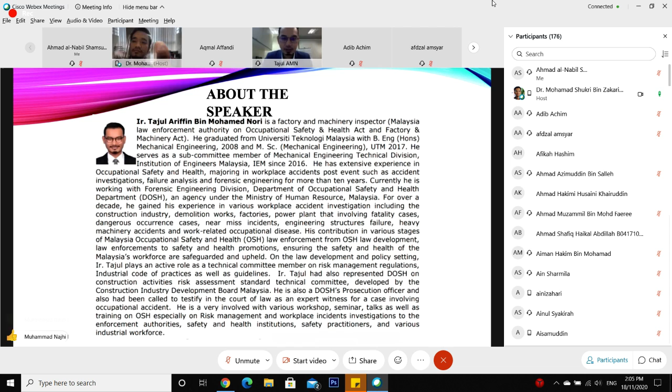Okay, Assalamualaikum and very good afternoon. Everyone can hear me? Waalaikumsalam warahmatullahi wabarakatuh, yeah we can. Hi guys, so I see a lot of students here. I hope you guys stay safe at home, I guess. So first of all, I would like to thank the organizer, the college, the Faculty of Mechanical Engineering,

University Technical Malaysia Melaka, for inviting me for today's session. So let me share my screen first. You guys see my screen now? Yes, you see my desktop, right? Right.

Okay, so let's go on to the introduction to occupational safety and health. So what is OSH? The objective, the reason why we need occupational safety and health, is it is a tool for any organization as their business strategy and the method to prevent work-related injuries or ill health, so that your workplace is safer and healthier.

So this helps employers, owners, managers of any organization to improve safety and health conditions at their workplace. So normally they put a management system, the OSH. By the OSH, it will help employers and workers to find a way to get a cost-effective and practical solution

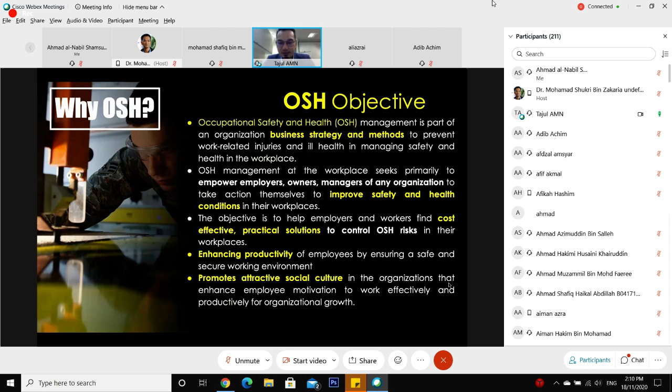to control any hazard or risk at their workplace that might harm their workers. And then, of course, if you properly manage your OSH at your workplace, you will prevent accidents, and straight away you will improve your productivity without any accidents. And this will promote an attractive social culture for the organization and will enhance the motivation to work more effectively.

If someday you graduate and join, or maybe you will have your practical training in the industry, if you go to a multinational company, then you see the social culture a bit different compared to the small medium industry, because they put safety above all for their work, their business strategy. Yes.

And last but not least, by managing OSH, you might comply with laws and regulations. In our country, we have laws and regulations that oversee OSH at the workplace. So management of OSH is something essential for your business.

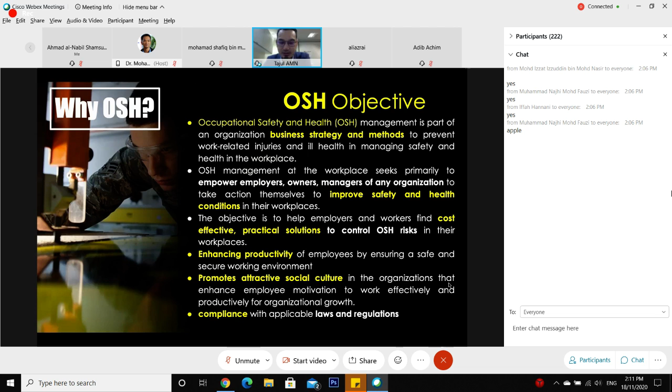Okay, let's take a look at the safety and health scenario. According to the International Labour Organization under the United Nations, the ILO, every year almost 2.78 million workers die from occupational accidents and work-related disease. This is a very huge number.

So we see the current pandemic, the COVID-19. I think it's almost a year since the outbreak. The total number of deaths from COVID-19 is about 1.3 million, if I'm not mistaken, and that's half of this number for a year. So workplace safety is something we need to look for. We cannot neglect this.

And about 374 million workers suffer from non-fatal occupational accidents. It means they have the accident but survive, though living with difficulties and disabilities. It's a big number, a big population. And among adults, 5% experience hearing loss and 20% suffer lower back and neck pain due to work-related exposure.

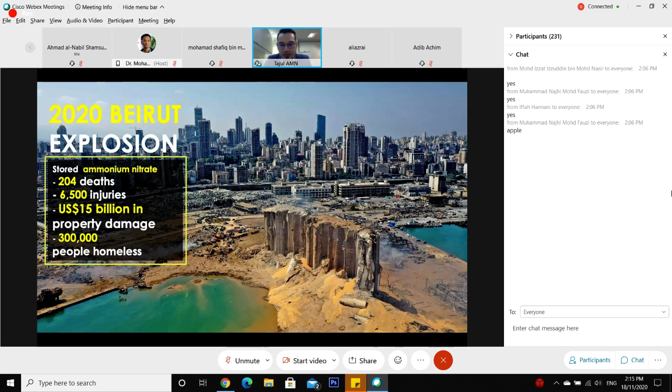So let's look at some accident cases that happened around the world. This is the Beirut explosion that happened this year in August. It's a very shocking accident caused by stored ammonium nitrate. This caused 204 deaths, 6,500 injuries, and the cost of the accident is about 15 billion US dollars in property damage, which caused about 300,000 people to become homeless. In our country, we have regulation under OSHA covering the control of industrial major hazard accidents, which involve things like ammonium nitrate. So we have regulation that may protect our country from an explosion like this.

Then the Deepwater Horizon, the BP oil rig explosion in 2010 - the damage is very catastrophic. The platform sank into the ocean. This caused about 11 worker deaths, while 17 others were injured. According to a journal from 2018, the cost of the oil spill is about 145 billion US dollars. It's a very huge amount, and this is in US dollars, so compared to our annual budget, it's still multiple times more than our annual budget.

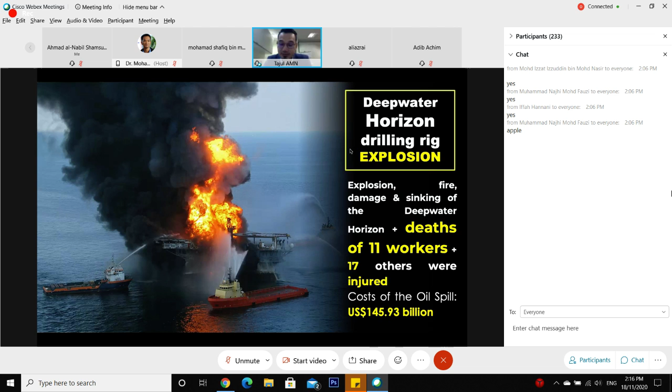Then another shocking accident happened due to the collapse of a crane in the Holy Land of Mecca. This caused about 111 people to die and injured 394. These are some of the cases that happened around the world that we need to consider when dealing with engineering management in the workplace.

Okay, looking at our local context in Malaysia, almost every week we have a very shocking accident that involves the public and also the workplace, like tower crane structure collapses, factory explosions - this looks identical to the Beirut explosion. This happened in Penang, a factory explosion, and currently we are under investigation looking into this. This is an SME industry. Also, workplace accidents affect the public who use adjacent roads, like the case that happened in KL recently, which affected a woman. It was lucky she escaped death, but this accident is something we cannot take for granted. We need to make sure this will never happen again.

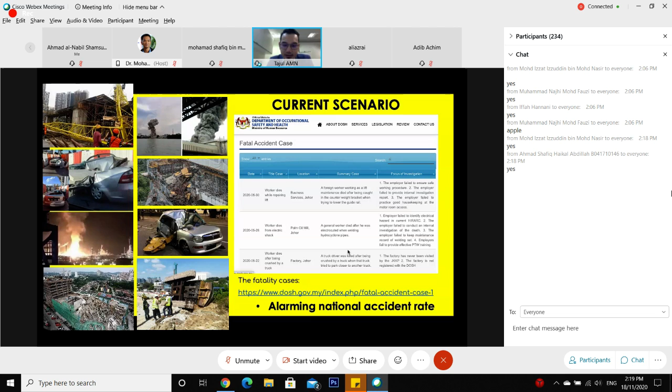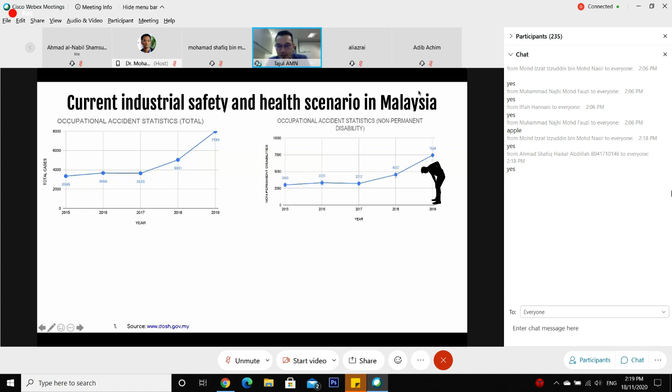So I would like to share with you the statistics on accident cases around our country. This is the statistic of number of accidents for the 5 years. We can see the increase in accident numbers, and also for the non-permanent disability accident and disability accident cases, the trend is increasing. For fatality cases, there isn't much change in the number of cases. So one of the reasons why we see the increase of accidents is also because of the increase in the number of accidents being reported to our department, to DOSH.

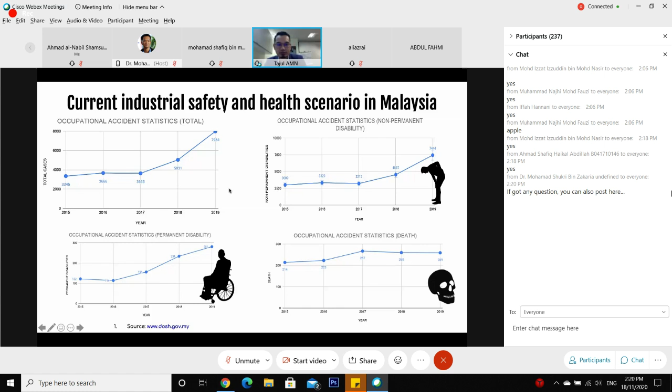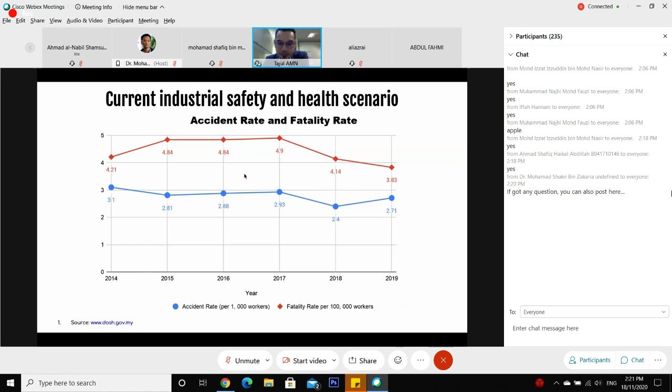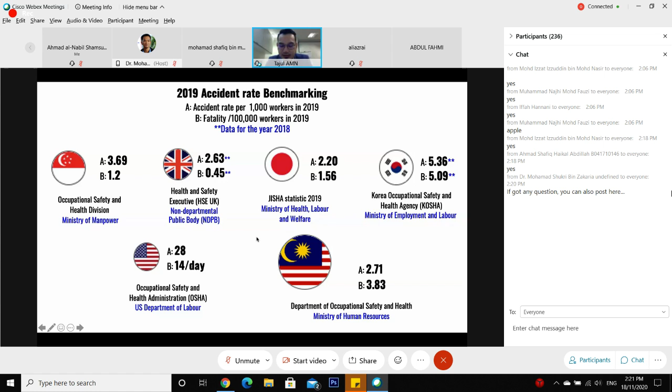If we compare to other developed countries, our rate of accidents in 2018 is almost close to the United Kingdom, but our fatality rate is higher compared to our neighbor country, Singapore. So we should not be happy with the number. We need to do something to reduce the accident rate.

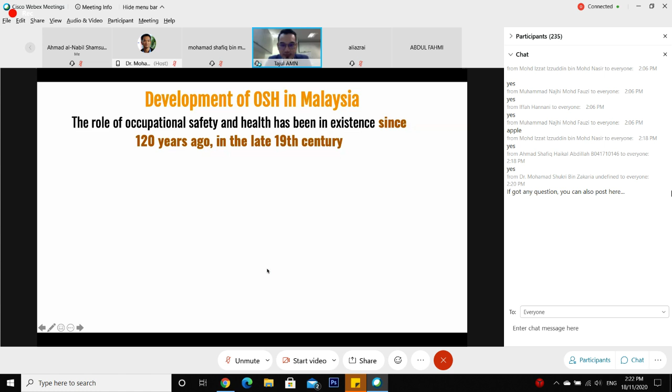Now I would like to share with you the development of OSH in Malaysia. The OSH exists from the 19th century. Back in the late 19th century, our historical background, we were very famous with tin mining. So the first law on OSH was the boiler ordinance, before our independence, enforced by the machinery branch under the mineral department. Most of the safety focus was on boiler safety.

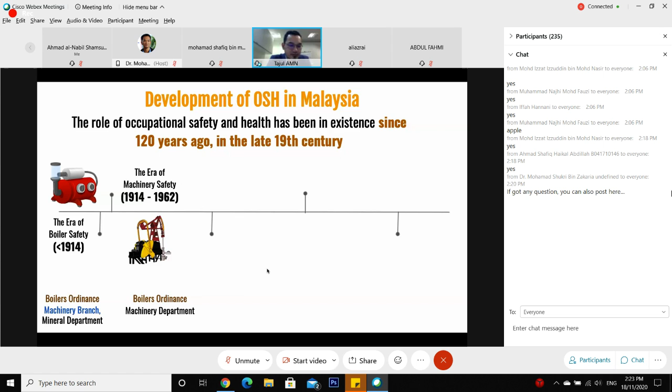That's before 1914. Then there were not many changes until 1962, still under the boiler ordinance law, but the machinery branch from the mineral department expanded to become the machinery department under the Ministry of Human Resource. Before that it was the Ministry of Labour. Then after our independence...

Because of the Industrial Revolution, it became the era of industrial safety. From that era, the Factory and Machinery Act 1967 was gazetted. This is the law on factory and machinery, and the department changed to the Factory and Machinery Department. At that time, there were a lot of factories being opened.

From 1970, before 1994, our country started looking into safety and industrial hygiene. Since 1994 until now, a new law has been introduced to our country, the Occupational Safety and Health Act 1994, OSHA, and the Factory and Machinery Department changed to the Department of Occupational Safety and Health, better known as DOSH.

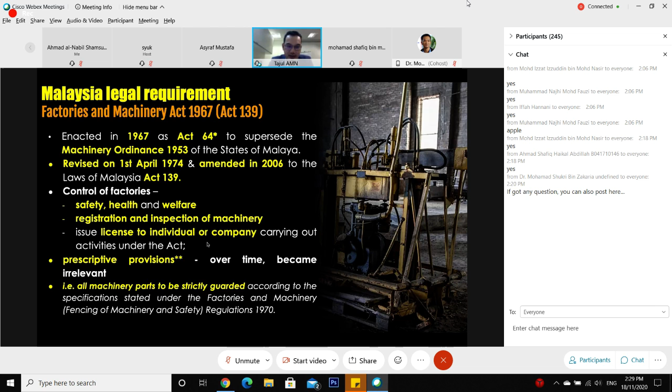And the provision of the act is more prescriptive. For example, everything is spelled out specifically in the provision — like the guard of the machinery will tell you the specific specification you need to comply with. This is a very old law, and over time it is not relevant due to changes in the state of the art.

So the approach of FMA is using the checklist system. For example, when you want to have your machinery, it will tell you everything what item you need to have at your machinery, like the safety device. Everything is strictly specified in the provision of FMA, and it emphasizes on the workers and machinery to prevent the accident. And because of this prescriptive law, the impression is that OSH responsibility is on government control, and this makes the industry depend on the government regulation.

So the FMA only covers some industries, but other industries not covered by the FMA have a very alarming rate of accident and permanent disability cases. So the government drafted a piece of law to control the other sectors.

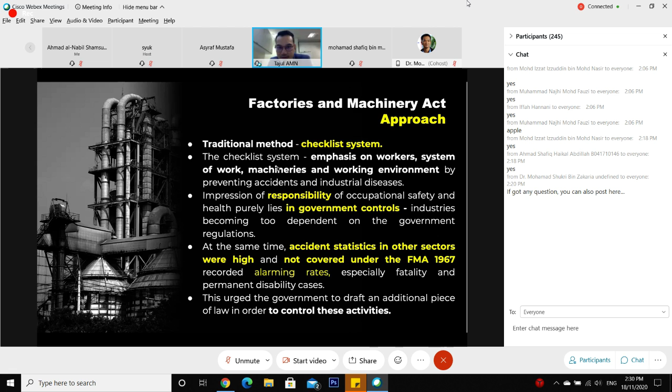So in 1994, the government gazetted a new law known as OSHA 1994 to cover the limitations of the Factory and Machinery Act. Because the Factory and Machinery Act only covers manufacturing, mining, quarrying and construction activities. Other industries, like foods, hotel, restaurant, and other business services, are not covered.

So OSHA came out to cover almost 90% of our total nation's workforce at that time, except for ships and the armed forces, because ships have the Ship Ordinance, while the armed forces are not covered by our law. And the approach is using self-regulation, and it specifies some of the general duties of the employer in the law.

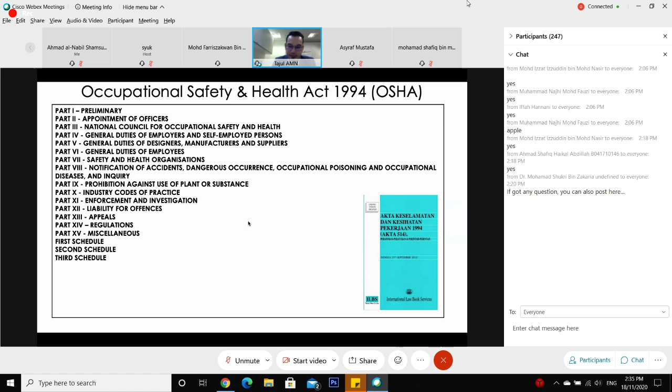For the FMA, the portion of provision looks less than the OSHA, but it tells you very prescriptive provisions. So it is thicker than the OSHA law.

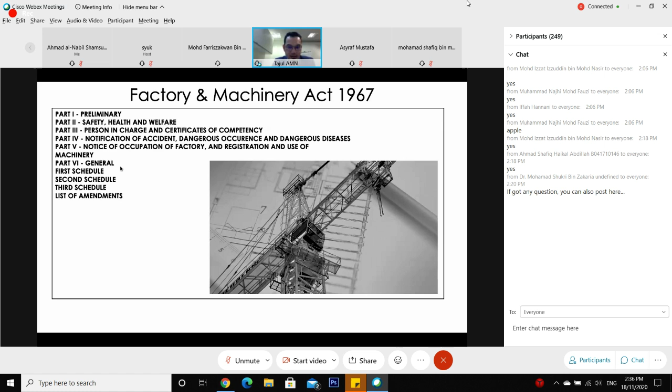So in the framework of the Act, under the Act, there are regulations, orders, industrial codes of practice, and guidelines. For the Act, you must comply with the Act, and the regulation describes what the Act needs in more detail. Also, for the orders, you need to comply with the orders. The industrial code of practice is the best practice that you can comply with. But for the guideline, it just gives you a guideline, and it is not mandatory for you to comply with the guideline.

Under the OSHA, there are provisions to report any accident or dangerous occurrence, and it tells you in detail what you need to do when you have accident cases under the regulation.

When you have an accident at the workplace, the requirement to report the accident is under the NADOPOD regulation.

Apart from the mandatory requirement, there are OSH voluntary requirements like the MS standard, MS 1722, our national standard for OSH management system. This is not compulsory, but if you have the system, you may comply with the law. There's also the international OSH system, ISO 45001, which will replace OHSAS. Currently most workplaces use OHSAS, but that will expire next year. Apart from that, there are guidelines from the ILO that any employer can use to manage safety and health at their workplace.

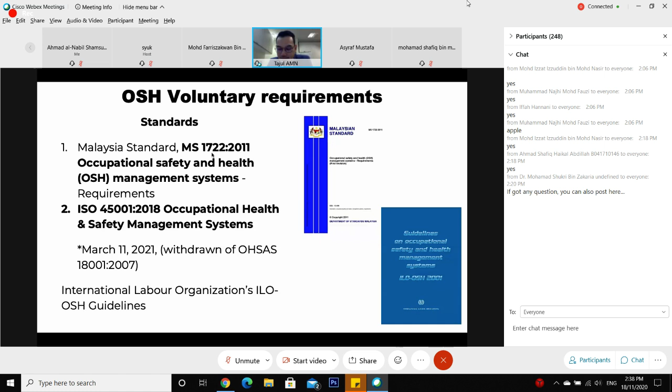So previously I told you there are two laws. Currently we are trying to merge both laws, the Factory and Machinery Act and OSHA, and it has already been passed to parliament for the first reading. It needs to pass the second and third reading before both Acts can be merged. There will be a new OSHA maybe this year or next year, we don't know yet, it depends on our parliament session. So in future there will be only one single law that governs the safety and health of the workplace in our country. Okay, so far everything okay? Any questions?

Now I would like to share with you some of the workplace accidents that I have investigated at the workplace.

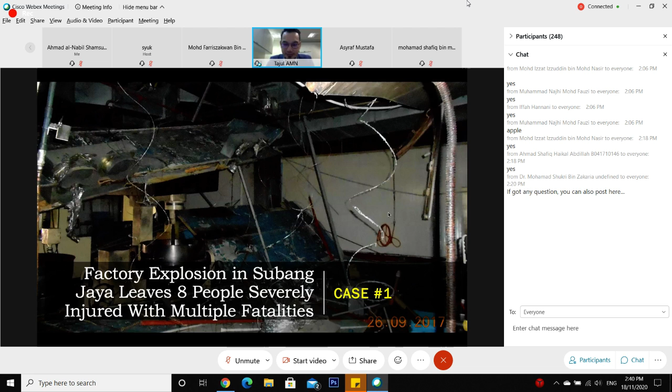So this is the first case, which happened in Subang Jaya, causing multiple casualties. This is an explosion case from a very famous kopitiam factory. Sorry for the disturbing image, but I think I have to share this with you. The case involved an explosion at a production floor in a food processing factory in Subang Jaya.

It happened in 2017, about 8 a.m. From this accident, 8 employees suffered serious injuries of varying degrees of burns, and all of them were sent to the hospital's special attention unit for emergency care. 5 of them were badly injured, about 20 to 80% burns on their bodies. One of them suffered a foot fracture, while 2 victims had only minor injuries due to the blast of the explosion.

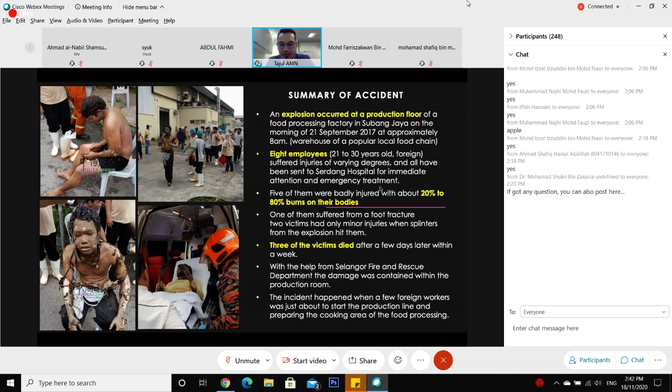Sadly, after a few days, three of them died. The bomba managed to contain the explosion from affecting other areas. All of them were foreign workers, and they were about to start production that morning at the cooking area for the food processing.

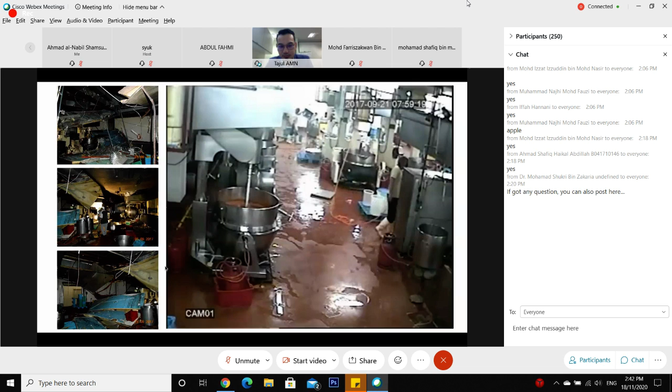This is the after-effect of the accident, the kitchen area. That morning they were cleaning up their kitchen, preparing for production. You can see the blast of the explosion. This is from another angle. It was caused from somewhere around here. You can see the video, right? Yes sir, very terrible.

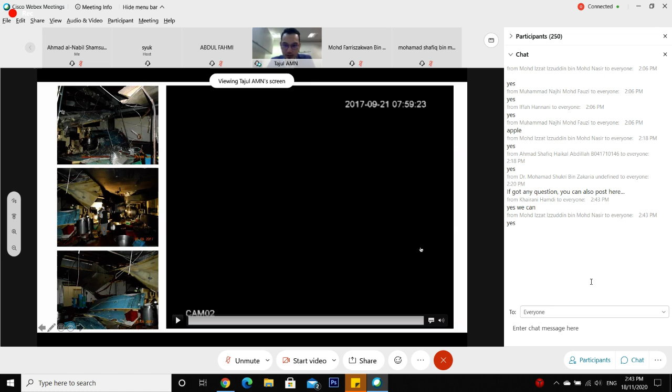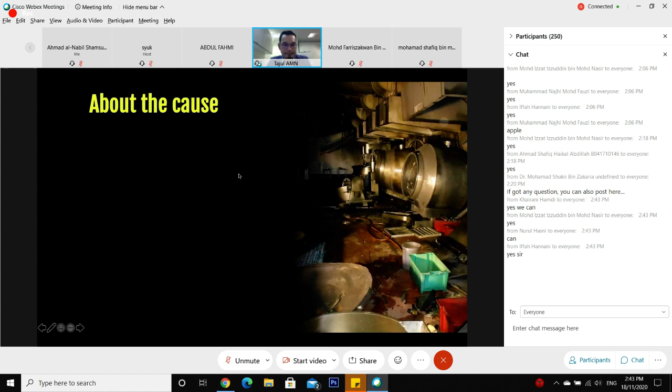The worker who turned on the cooker was a new recruit. We checked the record and found they didn't have any proper induction training or any formal training, they just put them into production. So please ensure when you join any company in future, once you graduate, please make sure you have proper induction training - this is very important.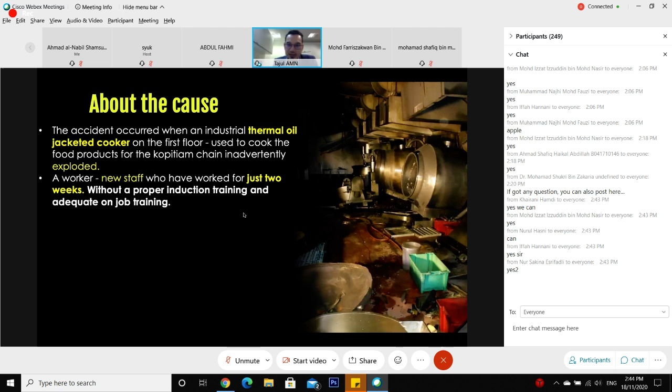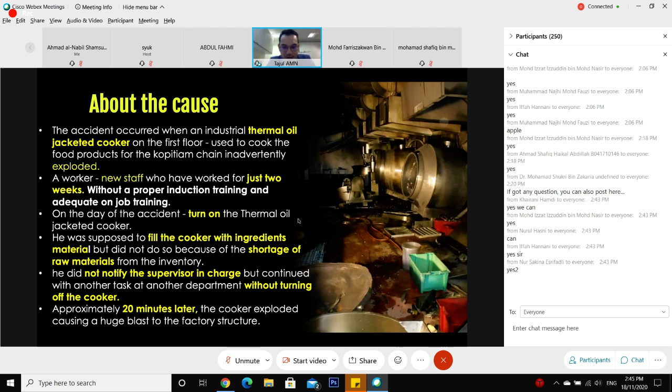On the day of the accident, he turned on the thermal oil jacketed cooker, and was supposed to fill the ingredients in the cooker, but when he went to the inventory, there was a shortage of raw material. He was supposed to notify the supervisor that there was no raw material, since he had already turned on the cooker, but instead he left the area and went to do other tasks, while the cooker remained on. 20 minutes later, the cooker exploded and caused a huge blast to the factory structure.

When we arrived at the site, we did the investigation. We found this is the thermal oil jacketed food processor. One of the cookers was badly exploded and ruptured - this is the cause of the explosion.

This thermal oil jacketed processor is different from a domestic cooker where you put oil in the pan - for this jacketed type, they put the oil outside the body in the jacket, and it has a safety valve and pressure gauge. There are a few types of jacketed food processors - some use steam, some electric, and some gas. For this accident, they were using LPG gas, but for the purpose of explaining, I'll show you the concept of how the cooker works.

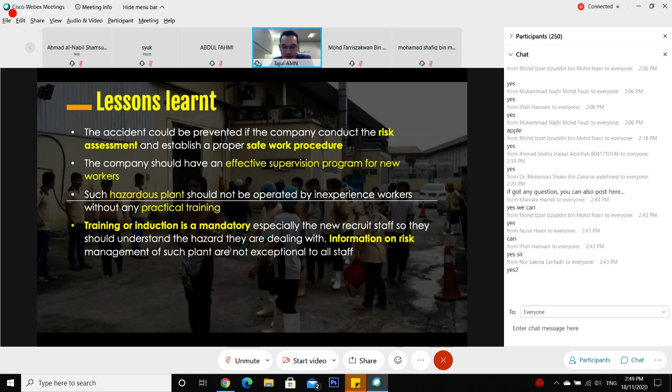Training or induction is very mandatory. You can see at any construction site, every day they have a toolbox meeting to remind their workers on this. Information on the risk of any hazardous plant like the thermal oil jacketed cooker must also be communicated to all staff.

And safety features like the safety relief valve must be maintained and periodically tested on their functionality to prevent such accidents.

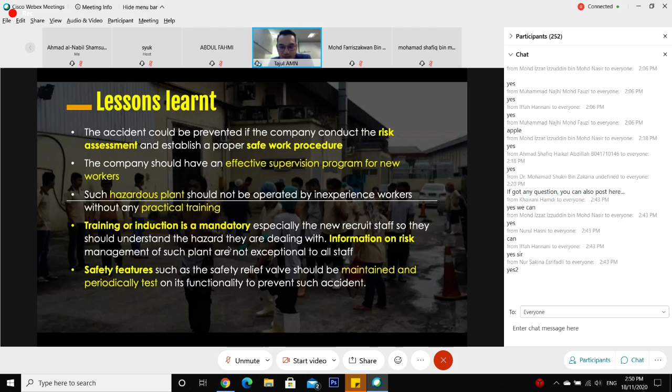Okay, so the second case is on the hazardous ammonia release. This happened in Malacca last year. A catastrophic anhydrous ammonia release due to thermal shock blast in a raw poultry processing industry.

From the accident, 31 workers suffered breathing difficulties and 3 were sent to the hospital intensive care unit due to respiratory system problems.

A few minutes after the explosion, the factory area was filled by a large amount of ammonia vapor cloud, and they immediately forced evacuation, and emergency response was activated.

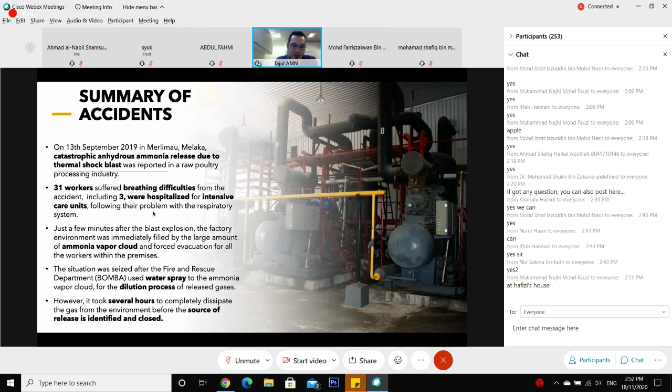The Bomba went to the factory and sprayed, using a water blanket to dilute the ammonia, because once ammonia is released to air, you need to use water to immediately dilute the gas. However, because the source of release continued to supply to the environment, they asked the supplier to weld the source of release from the end pipe in this area.

So this is the factory. They process poultry, the chicken poultry.

So the source of release was from an end pipe rupture due to the hydraulic shock event.

In the factory, they're using a blast freezer. The blast freezer was used to rapidly freeze the poultry product. You can freeze a chicken in less than 1 hour using this blast freezer, and for this freezer, they were using ammonia refrigerant.

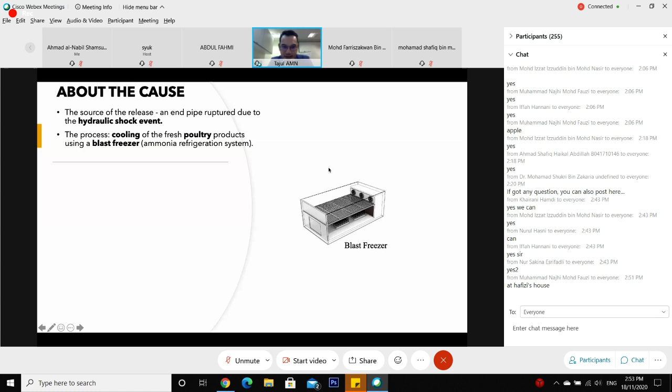The hydraulic shock was induced by the rapid pressure rise in the pipeline, so the ammonia supply to the blast freezer occurred because during the accident there was a defrosting process stage.

First you put the raw poultry chicken into the freezer, then you freeze them. Before taking out the chicken, they need to do the defrosting process, and the ammonia was supposed to stop at the defrosting stage, but because of the malfunction of some features, the ammonia continued to be supplied.

You know that ammonia is a cold chemical, and inside the blast freezer they will release hot gas after the frozen stage, because of the continuous supply to the freezer.

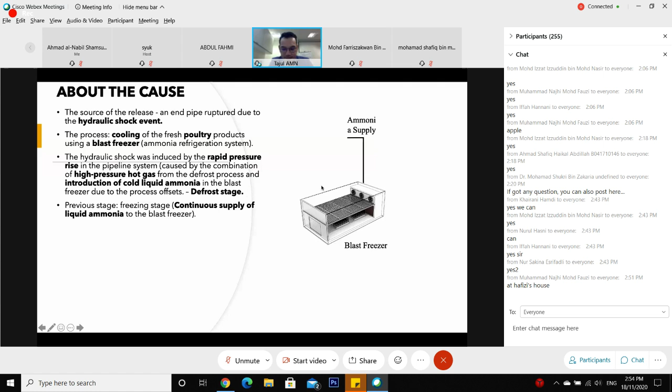After the operator stopped, the solenoid valve was supposed to cut off the ammonia supply, but because this solenoid valve malfunctioned, the ammonia continued to be supplied.

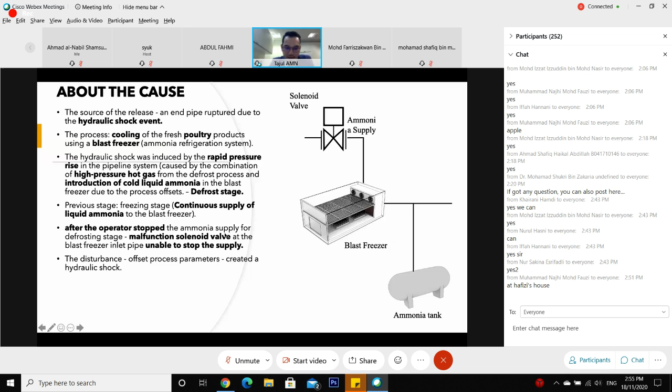So because of the offset of the system, it created a phenomenon known as hydraulic shock. This is how the hydraulic shock happened, when the hot ammonia gas meets with the liquid ammonia, because it's not compatible - the hot one meets with the cold one.

Due to the incompatibility, there was turbulence inside the pipe, causing something like a tsunami inside the pipe, creating a hammering effect, hitting one of the end joints until the pipe could not withstand the hammering effect and ruptured. Once the ammonia was released to the air, it expanded from liquid into gas.

So this is the solenoid valve. We have taken apart the valve from the system, and we studied the inner components. We found that the ones involved in the accident have been badly damaged by the ammonia system.

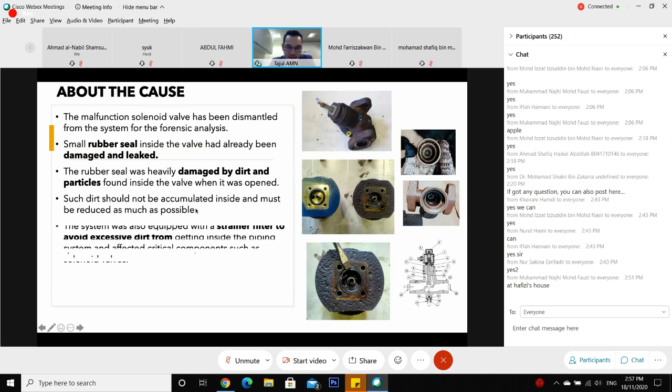The rubber seal inside it was already damaged, and we see the valve has a lot of dirt and particles. So the dirt was accumulated inside the solenoid valve, and it was not supposed to be inside it because the system has a strainer, but when we check the strainer, it was not properly maintained, causing some deposit of dirt and particles in the system.

So this is the reason why the solenoid valve cannot properly function, because the mechanism is already damaged.

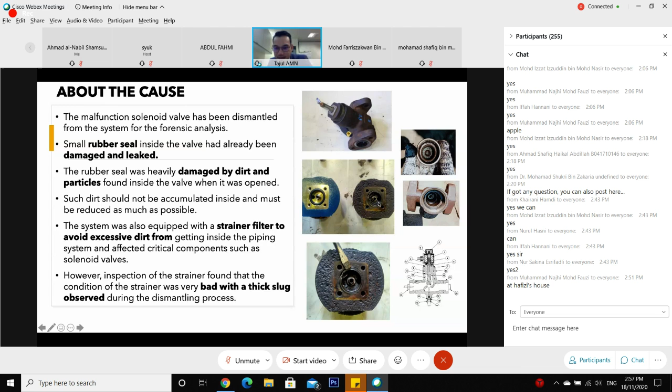So from this accident, the hydraulic shock phenomenon is a common cause of failure for the ammonia refrigerant system. And there are two identical cases that happened in the US in 2007 and 2010. So it's a common type of failure for the ammonia system.

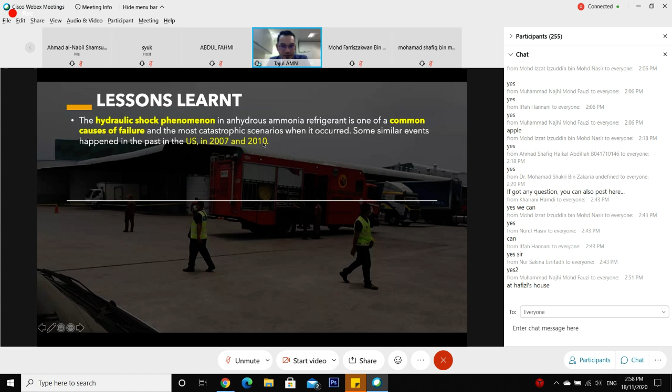And from our investigation, we find out that the owner and the supplier failed to properly maintain the refrigerant system, which led to the accumulation of dirt and particles in the system, affecting the solenoid valve.

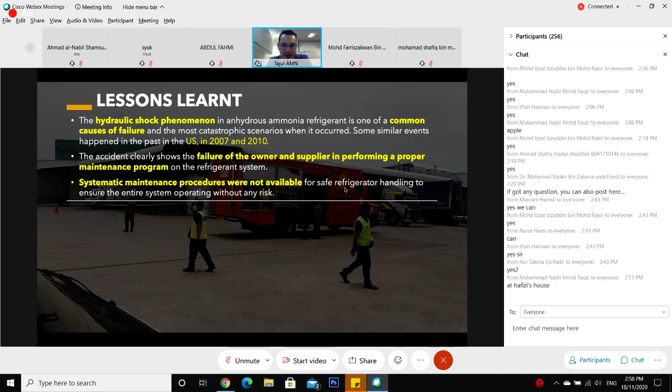And there was no proper maintenance procedure or checklist for the refrigerator, and the critical component like the solenoid valve, they were supposed to change the valve after 5 years, but from the record we checked, they never changed it for the past 10 years.

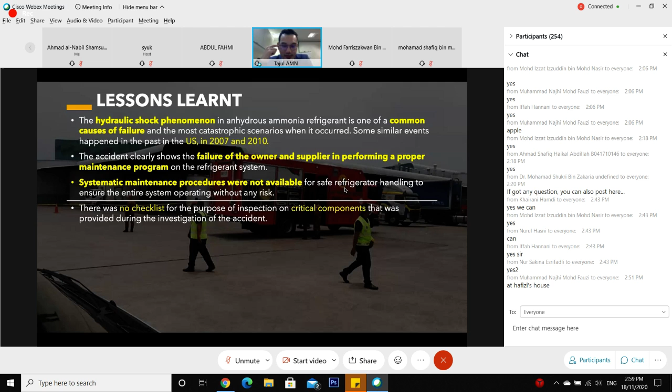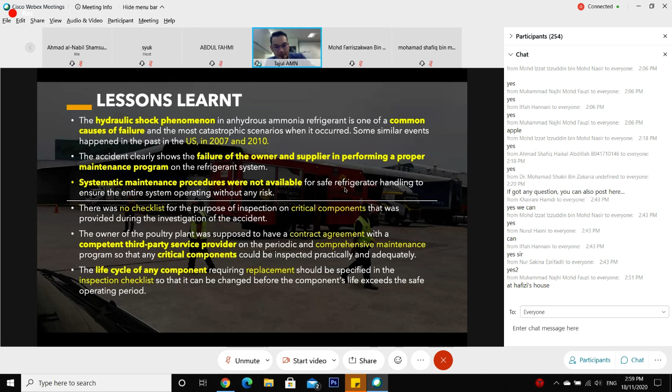And to maintain such a system, they need to have a proper competent company to service or maintain the system. And at least they must have a periodic comprehensive maintenance on the critical parts, like the solenoid valve. When we check the manufacturer recommendation, they need to change it after 5 years. There are some conditions where they can use it for a longer period, but that was never complied with by the owner.

So another case I would like to share with you is a man who was crushed to death by a paper shredder machine.

So for this case, a worker was killed inside a paper shredding machine that kicked into gear as he was releasing a bulky, jammed paper. The company was a factory that manufactured paper for product boxes. The accident took place in 2016 in Shah Alam.

The victim was tasked to operate a shredder machine for rejected paper, for the purpose of recycling. When he operated the machine, I think he wanted to put extra papers into the machine, but the paper had already jammed, so he climbed on the machine and kicked the paper using his leg, without any supervision.

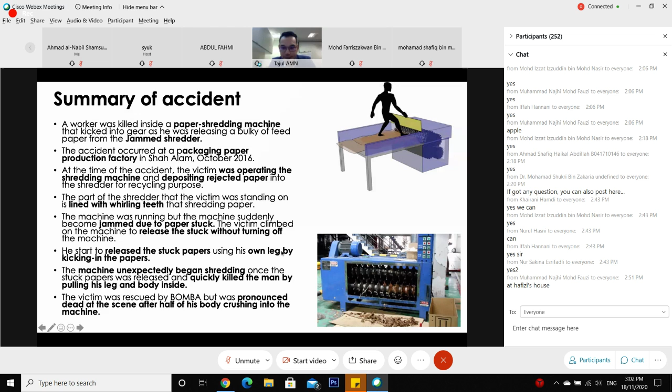So the machine was left idle for about 2 years because the factory had moved from Subang Jaya to Shah Alam, and they did not use this machine for 2 years. And suddenly they put it into operation to support the production output.

And the operator, the victim, was a foreign worker. So when we checked the machinery, there were safety features installed, such as the guarding door and the safety switch. But there was no proper safe work procedure, and no risk assessment had been conducted for the use of the machine.

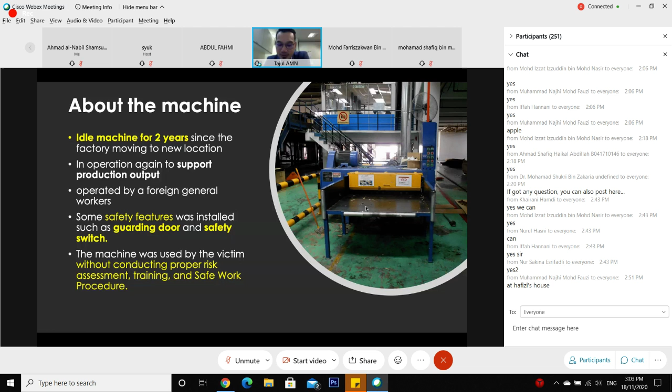So when we look into the detail, this machine, when you open the gate guarding the tooth of the machine, it's supposed to have a limit switch here that cuts off the power of the machine. But when we checked, there was some bypass on the safety features.

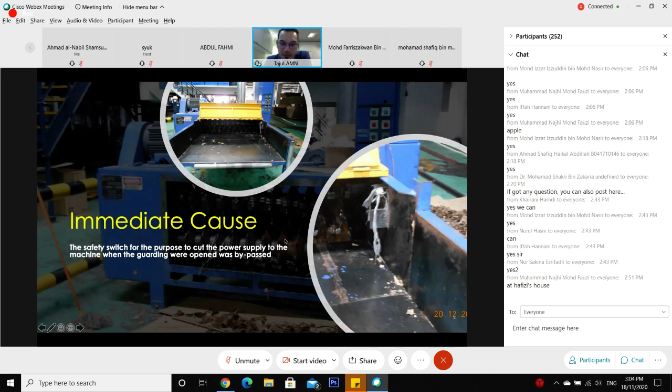So we suspect that the workers were trying to feed the machine with a large amount of paper, which caused a jam. Maybe it was due to production demand -- that we did not look into in detail.

So what happened after the accident? The employer took some corrective action. First, they put an emergency stop button, which was previously at the back of the machine -- now they put an extra safety switch, an emergency stop button in front of the machine, and over here, if you can see. And then they installed fencing to prevent any workers from climbing on the machine.

And if they open the fencing, they put an extra safety barrier like the safety switch over here, which also cuts the power supply. And to open this gate guarding, they need to open it by vertical opening using the pneumatic system. They cannot.

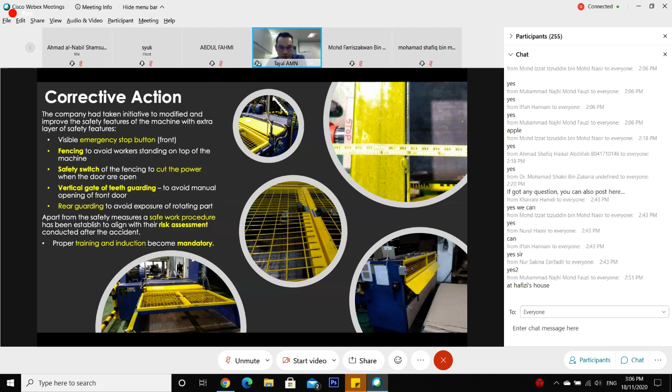Okay, so after the accident, they properly established a safe work procedure after conducting a risk assessment, and training became mandatory for any workers who want to operate this machine.

From this accident, the dangerous part or any rotating part of machinery should always be enclosed or guarded to prevent access, and safety measures must be developed for operation, maintenance, or troubleshooting. The guarding of machinery like this rotating part is a legal requirement under the Factory and Machinery Act.

When there is abnormal activity at the production area, they need to disconnect the power supply, or at least the maintenance personnel should handle it, and the operator should not troubleshoot by themselves. This must be put into a proper safe work procedure whenever machinery has a trouble issue that needs troubleshooting.

So risk assessment is very important when dealing with machinery. For training, safe work procedures and engineering control requirements must be identified when you conduct the risk assessment. And of course, for maintenance, the daily checklist must include a functional test so that the machinery has high safety integrity.

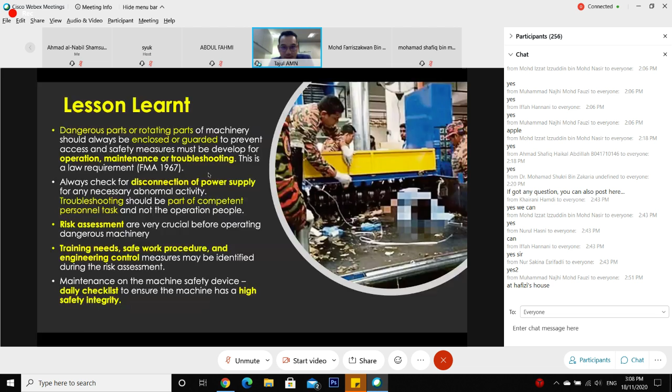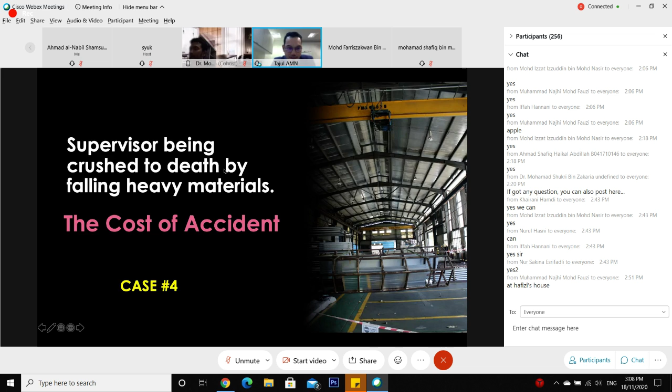Another case I would like to share is on the cause of accident. This case happened when a supervisor was in charge of transferring and storing finished product, in a factory involved in the manufacture of steel and aluminium products.

When he was tasked to supervise the area, he was hit by a steel product cart and a block of crane hooks from an overhead traveling crane. It is common for factories to use overhead traveling cranes to move product. The object fell from a height due to wire rope failure, which was used to transport aluminium products.

The victim was pronounced dead at the scene due to severe injuries sustained. The occurrence happened somewhere in Kajang in 2017 at approximately 10 a.m.

This overhead traveling crane, or OTC, was operated by a worker who was carrying two racks filled with square hollow aluminium, about 1.2 tons, when the wire cable snapped.

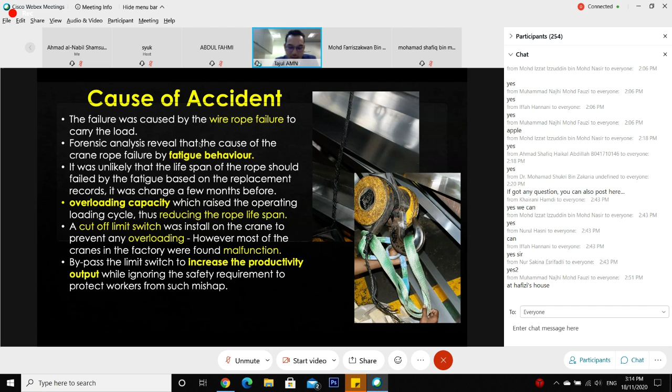We checked the factory and found it had many overhead traveling cranes, and almost 70% had a malfunctioning cut-off limit switch. We issued a stop work order for them to change the cut-off limit switch and reset it back to its original setting.

So from this accident, we have put the information on our web page. You can use this to study the cause of the accident.

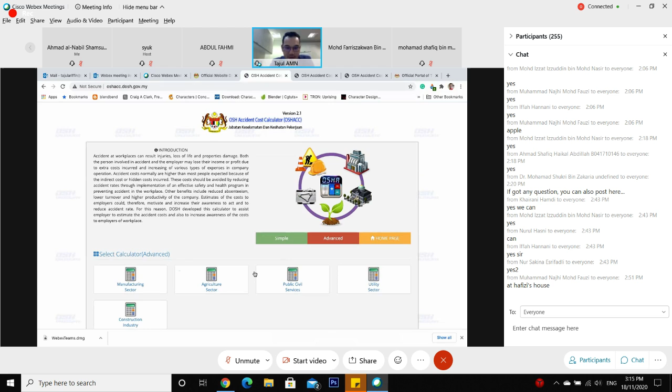So you can use the OSH accident cost calculator. There are parameters here that I used to calculate for this case. You can try to use this calculator to calculate the cost of accident. Then you put the input and you get the cost of the accident.

So from this case, on the surface, if we look into the medical cost, rehabilitation cost, the estimation of compensation, and the funeral cost, it is about 111,000.

That's on the surface, but in detail, if you look at the indirect cost like the productivity loss, worker replacement, because this is a management level, the administration and legal fees, investigation costs, machinery or equipment damage, product damage, fine and penalty, and the prevention costs after the accident, the corrective action, it will cost almost 644,000.

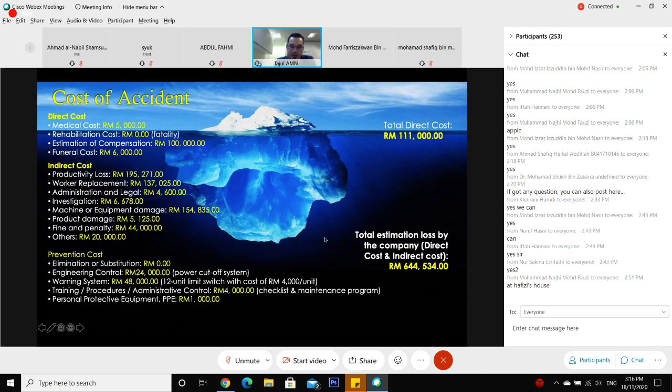That is a cost borne by the company, but the family also bears a cost, almost half a million. And the total cost for both the company and the affected employee is more than 1 million.

It looks like a simple case, but the cost of the accident is not small. It's very expensive. If the company had taken a reasonable step to properly maintain the wire rope, I think this would not even be 5% of this cost.

So what we can learn from this accident is that failing to observe safety procedures in the handling of an overhead traveling crane caused the death of the victim. The engineering controls such as the safety limit switch must be properly maintained. You cannot bypass the safety features. When we install the safety features, it was intended to prevent such an occurrence.

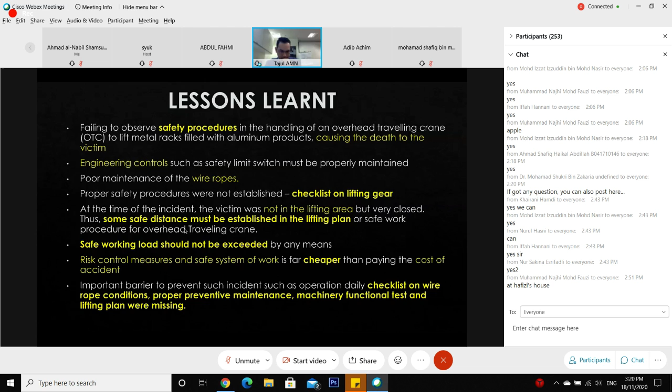Okay, this is another case that I would like to share with you. A resident engineer fell to his death at an MRT construction site while doing inspection work last August. Even though we are engineers with a high level of safety awareness at the workplace, we are not exceptions to accidents like this. So always ask, is it safe, when you go to any workplace or undertake your technical work. Even engineers face situations like this.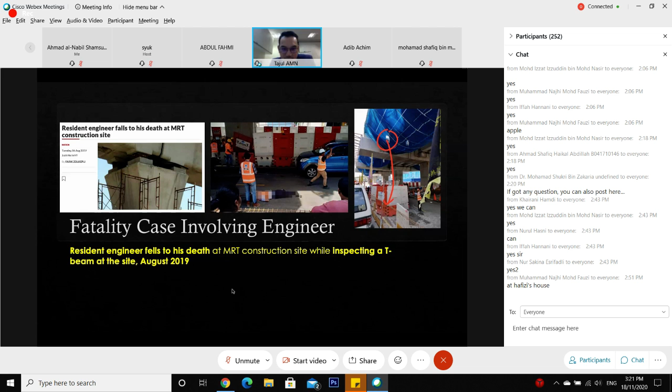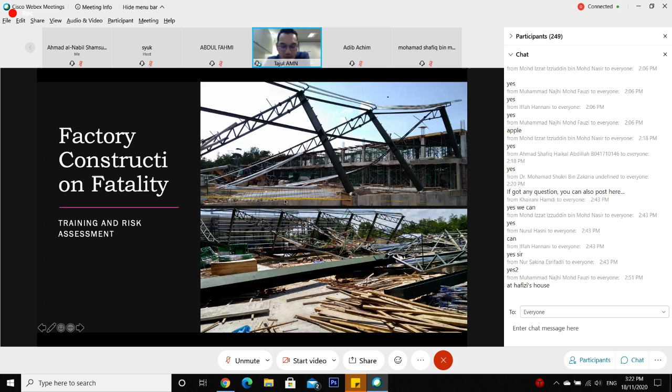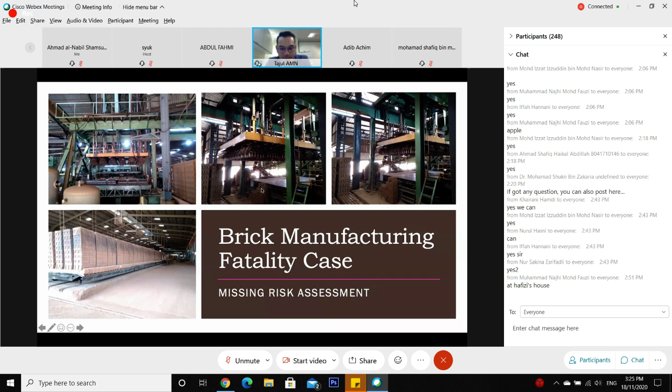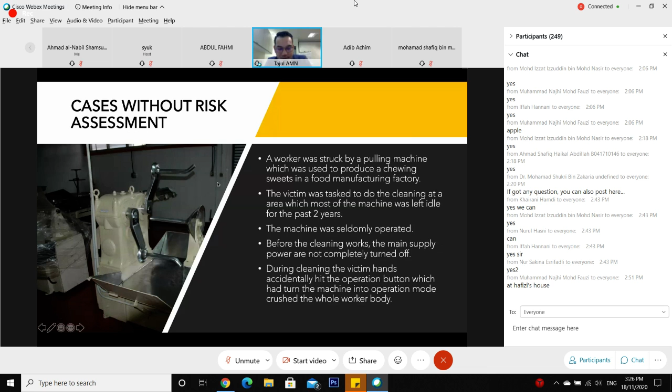The machine was used to process the chewing sweet, chewing gum, and had been left idle for 2 years. On the day of the accident, three workers were tasked to clean the area. Before the cleaning work, they were supposed to turn off the power, but for unknown reasons, we found out that the power supply was not cut off.

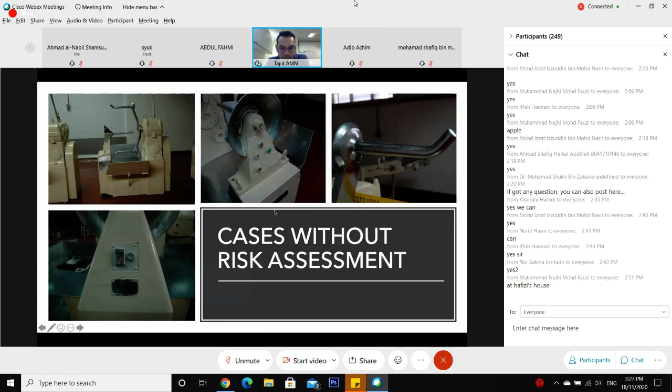So while cleaning the area, he felt tired and sat on the machine, and the arm of the machine, when the victim hit the button, the machine automatically turned on and hit the worker.

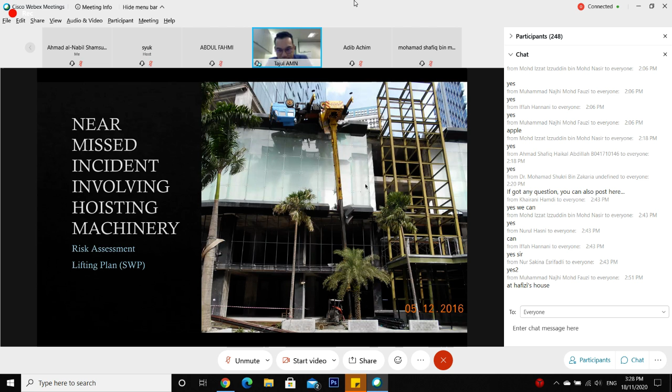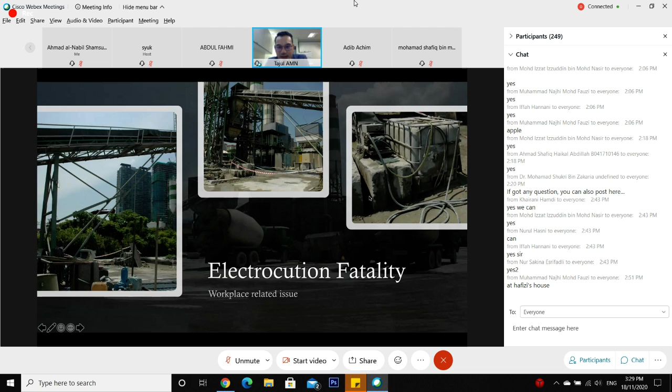So from all these accidents, you can see that it is important to have risk assessment. I will tell you in detail what risk assessment is. Negligence of worker safety can cost life - you cannot take things for granted.

Some of these cases happen because most employers don't have adequate knowledge of proper risk management, and most control measures rely on their workers rather than considering safety from the design stage or putting safety controls in the system of work. In some cases we found control measures like safety switches existed, but the implementation and maintenance was not there. Another important factor is communication on risk - it's important to educate and train your workers on how to deal with the hazards and risks they are dealing with.

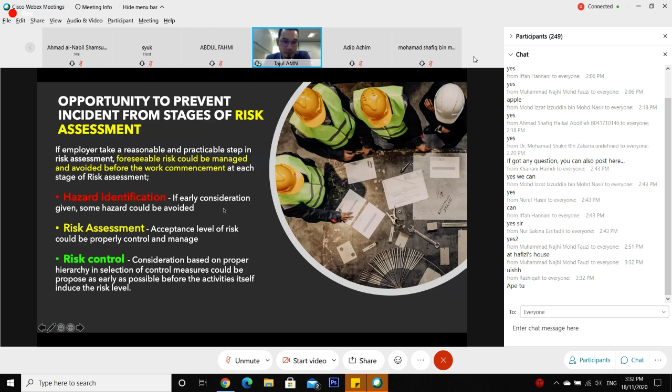So actually the risk assessment is a proactive measure that we can foresee how accident can happen, while the incident investigation is a reactive measure, meaning we wait for things to happen, then we know what need to be done. So the risk assessment is the stage that we can proactively identify what accident can be prevented.

So the risk assessment is the cornerstone of managing the risk to safety and health of the workers. It provides you the systematic and objective approach to assess the hazard and its associated risks.

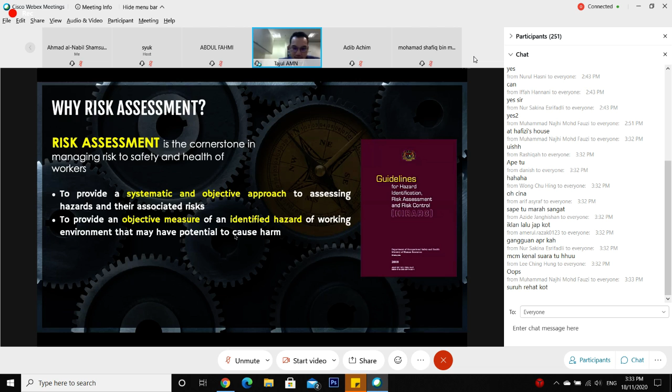By conducting the risk assessment, you will fulfill the general duties of the employer spelled out in OSHA. So DOSH established guidelines to identify the hazard, to conduct a risk assessment, and the risk control. This guideline is known as the HIRARC guideline. You can download it from the DOSH website under the guidelines.

This is something you can just learn by reading it and understand how to conduct a risk assessment, because things like this may not be taught in your undergraduate program. So you need to read this, and it will be useful in your future career.

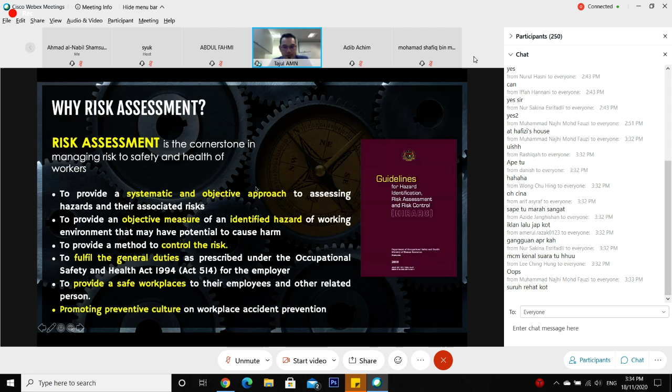So just some notes for you. Someday you will graduate and become an engineer. So why does an engineer need to embrace OSH? First, the engineer is responsible for protecting the safety, health, and well-being of the people who are and will be impacted by his or her works. Remember, when you become an engineer, for example a designer, you have to think how your design can prevent accidents, meaning design for safety.

And as an engineer, you have an ethical obligation. The engineer has a code of conduct, which is the code of ethics. As an engineer, when you see any hazardous situation or any risk, you need to do something. You cannot let the situation affect people. That is an important thing for engineers to remember.

So sometime in the future, you may face a situation where you need to decide whether to cut cost over safety, like when you are going to optimize something such as your design. You should not only consider the cost, you must also consider the safety. That is spelled out in the code of ethics.

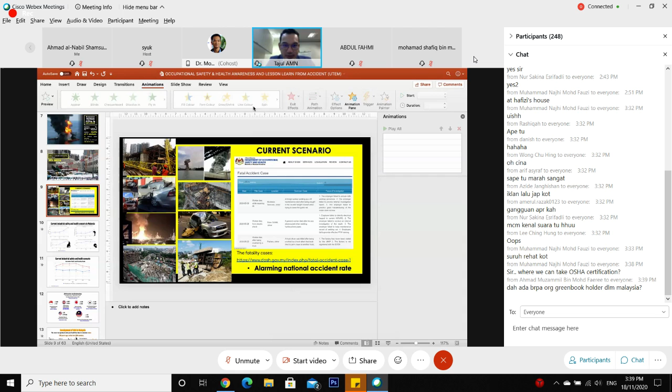Let me stop the... Okay, OSHA certificate. OSHA is not a certificate.

OSHA is a law. Okay, OSHA, you can download from the DOSH website. You go to www.dosh.gov.my. You can see my screen, right? So you can download OSHA from the website here.

So I believe your question is, is there any certification, I mean competency program under OSHA? So under OSHA, for example, there is a requirement to have the safety and health officer. For safety and health officer, nowadays there are many training providers that train safety and health officers. You can go to, for example, NIOSH, where you can have a 2-week program for the safety and health officer.